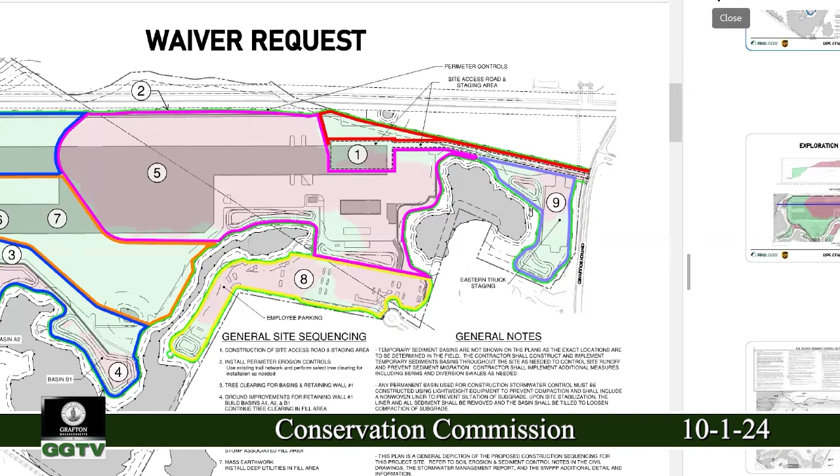Okay, that's very helpful, I appreciate that. I guess the only question I'd have remaining would be: if our third party is going out there, if Leah or Jan or whoever's visiting the site and the erosion control is something out of whack, what's the response? Would that go directly to the superintendent or the foreman? I've seen these things take time in other projects where it has to go up, and someone has to authorize someone to go out and spend money to adjust something because it's out of whack.

So I want to make sure that if the erosion control is not properly put in and we've got a hurricane bearing down, or a significant storm, and we're doing an inspection and something's awry, is there a timeline or a flow that says the superintendent has the ability to fix it within 24 hours, or whatever the typical timeframe is, because of an oncoming storm or concern that a rain event will wash out some other area of the site?

So there's a couple things, just by law and so forth. Bottom line is that unfortunately doing it ahead of something happening is sometimes difficult. But if something does happen, we have some pretty robust things and people to bring in. The whole idea is having someone on site doing it, and we'll have to have a contact person. Obviously they bring it up, and then their response is they're responsible for it. But ultimately, if they're not responding, I get your point.

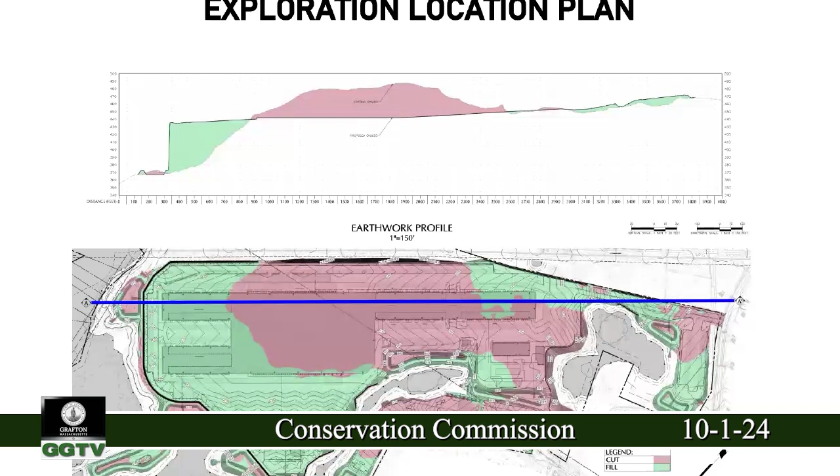Next waiver is work within the no disturb zone, and this is under the bylaw. Leah, anything to add to this? Nope, and again, this has that small area that's being relocated.

Okay, go through the commissioners to see if anyone has a specific comment or question on this. Travis: are we talking about the wetland mitigation that was proposed in the middle of a storm basin? Yeah, so originally they had it underneath the parking. It's an existing depression that falls under our local regulations, it's not jurisdictional at the state level. They originally were going to put it inside a basin and now it's not.

Yeah, it's over. Okay. I couldn't find the updated plans, the old ones I think were still showing up. So, okay, yeah, nothing else from me. Jonathan, I don't have any other questions or comments. Patrick, any questions? No. Okay, I have no additional questions on this.

Do I have a motion? I'll move to... my computer froze. There it goes. Move to grant a waiver for work within the no disturb zone. Second. A motion and a second.

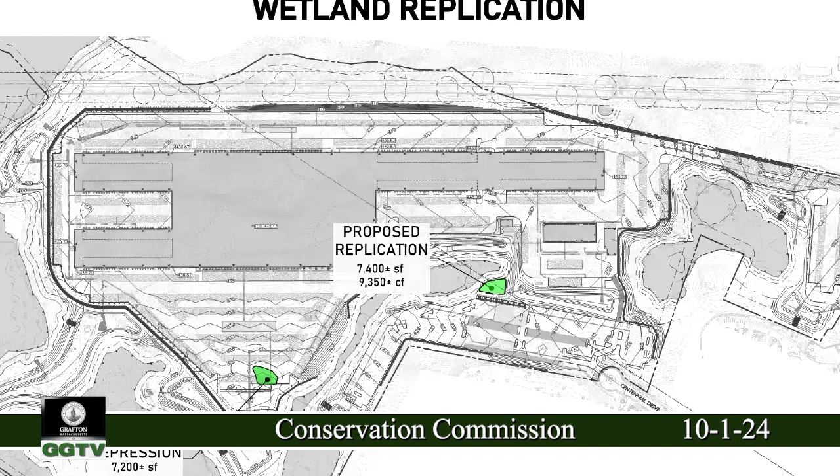All right, Leah, I'm going to turn it back over to you about going through the draft conditions and what the comments were from the applicant, so we can discuss them. Okay, I'm just gonna go through until I either have a question or you guys can stop me. Does that work? That works great.

So for findings at the top, I have that the wetland resource areas west of Summit Brook Pond on certain sheets were not reviewed and confirmed under this order, but everything else was by Ecotech. Number 2 is that isolated wetland and isolated land subject to flooding to be filled and replicated is only jurisdictional under our bylaw, not the act. The third finding just lists the impacts out, so we have those numbers. And the fourth finding is after consultation with our peer reviewer, the commission is in agreement with the applicant's assessment of the extent of riverfront area on site in relation to the beaver impoundment. We talked about that one quite a while ago.

Okay, next section are the waivers that we just went through, and then we go to general conditions from there. I have number 1 highlighted just because, as you can see if you go back to my agent report for a second, we will just need a final stamped plan set, both electronic and hard copy, that incorporates a lot of things we have talked about piecemeal in slide decks and revisions to peer reviewers, and all that needs to come back together into one final set that I can then refer to in number 1.

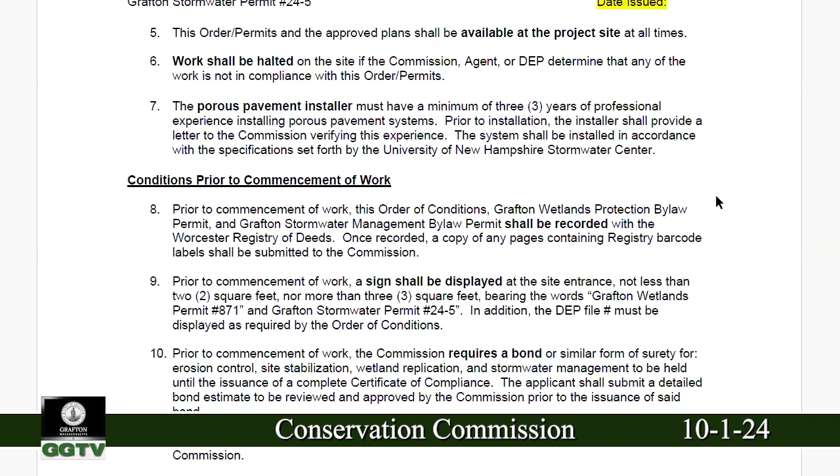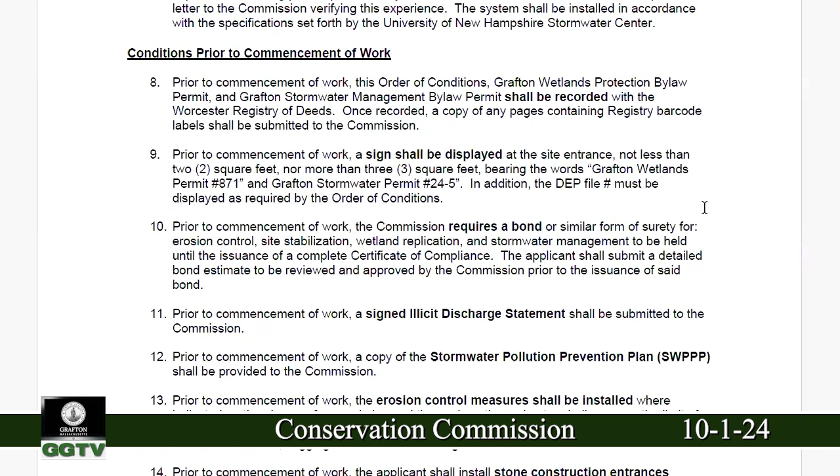Okay, then we get into prior to commencement of work. Number 8, they'll record the documents at the registry. Number 9, they'll put up their permit number sign on site. 10, we're asking for a bond for erosion control, site stabilization, wetland replication, and stormwater management. They go get an estimate of what it would take to cover that work. We send that estimate to our peer reviewer. Once we agree on that amount, then they go solidify the bond, which we hand over to the treasurer collector to hold on to. Number 11, we'll want a signed illicit discharge statement. 12, we'll want a copy of the SWPPP.

Item 13, erosion control will be installed where they show on their plans. Those along the perimeter will serve as the limit of disturbance. There is more to come about erosion control, by the way.

Can I just say one thing on 13, as far as the wording goes? Prior to commencement of work, the erosion control shall be installed where indicated on the above referenced plans. Just to add in there that this is the minimum amount of erosion control, and site conditions may warrant more erosion control. It's very specific, is that just because they show certain things on the perimeter, that does not mean they don't have

to do something internal. Again, it's just the erosion control plan is a static thing that you see once, but it changes every single week out there, so they need to keep up with it. So thank you on that one. Sure.

14 is for the construction entrance. They will have two, one on our side, one on the Shrewsbury side.

15 talks about them designating a staging area outside of resource areas and buffer zones. And then I had all construction trailers, dumpsters, portable sanitary facilities, material storage and overnight parking would be in that area. The perimeter would have erosion control around it. The ground would be protected for spills. Any spills would be cleaned up.

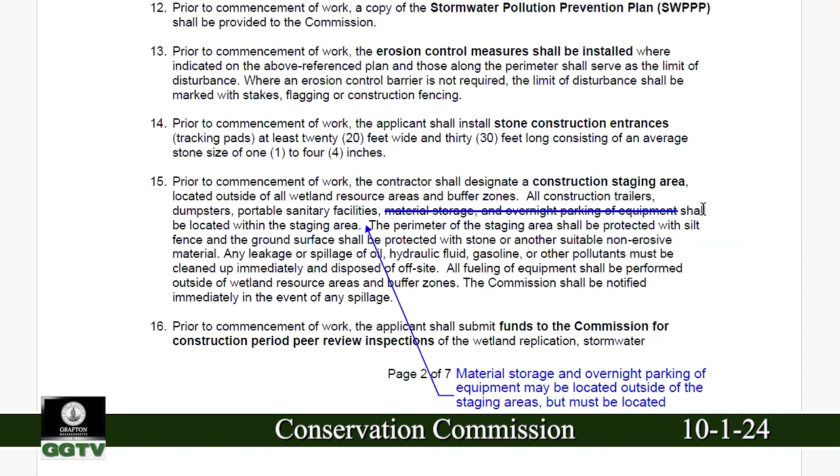Sorry, go ahead, Leah. I'm good. All right, 16, we're asking for funds for those construction period peer review inspections we talked about.

So that'll be to look at wetland replication, stormwater infrastructure installation, and general compliance. And I added that we will coordinate the amount we need to hold, and those inspection dates we can coordinate across Grafton and Shrewsbury because we're using the same peer reviewers, so we don't have to duplicate. Maybe we can get out there all at the same time, be a little bit more efficient.

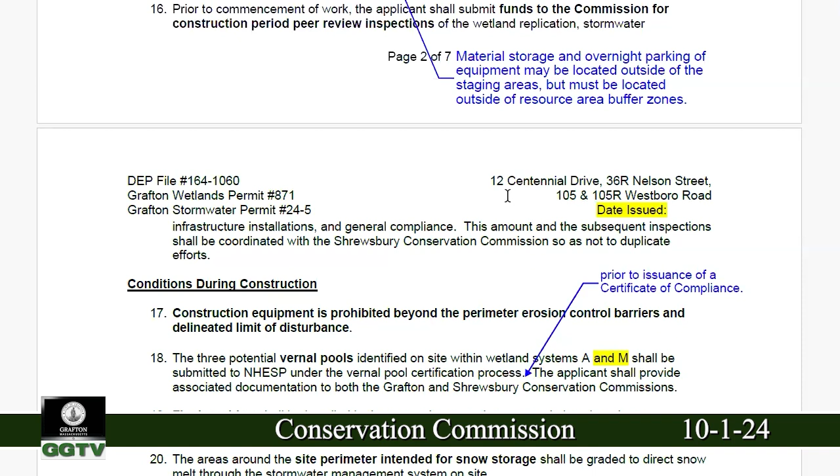So back to the applicant, anything so far within that section other than what we already discussed? Nope, it's all good. Okay, keep on going there, Leah, doing a great job. Thanks.

Then we get into during construction. So construction equipment is prohibited beyond the perimeter erosion control barrier and delineated limit of disturbance. The 3 potential vernal pools identified on site within wetland systems A and M shall be submitted to NHESP under the vernal pool certification process, and the applicant will provide the associated documentation to both us and Shrewsbury Concom.

I highlighted the one in wetland system M. That system is fully in Shrewsbury, so I wasn't sure that we could necessarily call that out here. I know we're trying to coordinate and have some consistency across the two towns, but I didn't know how you guys felt about calling that one out.

And then the applicant proposed a change to the language, just that this all happens before a COC is issued, which I'm okay with that part. My only question on that, what is the construction schedule? Just a broad one, 18 months, 36 months.

Closer to 18 months, okay. The only reason I'm asking is if it gets drawn out, then you're going to have more impacts to a vernal pool from all the activity in the area. So we just want to make sure that it's done in a timely manner so that it hasn't been altered such that certain evidence isn't found. That's all. So the 18 months is not bad.

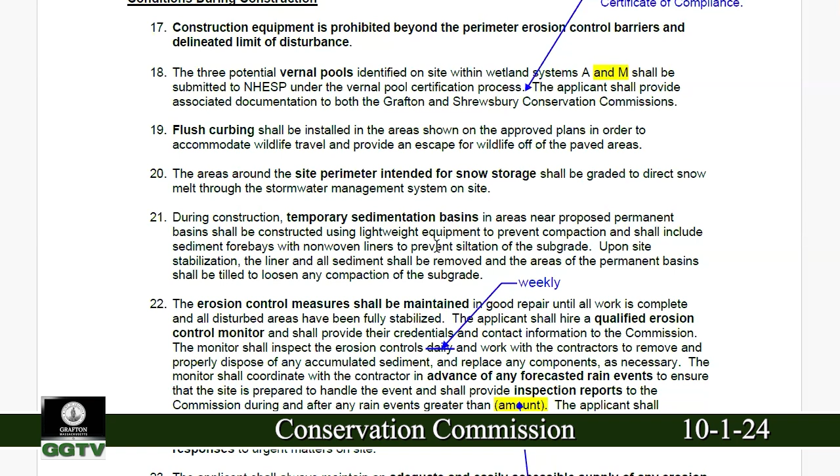21, there are temporary sedimentation basins in areas near proposed permanent basins shall be constructed using lightweight equipment to prevent compaction and shall include sediment forebays with non-woven liners to prevent siltation of the subgrade upon site stabilization. The liner and all sediment will be removed, and the areas of the permanent basins will be tilled to loosen any compaction of the subgrade. Most of that was actually proposed by the applicant.

22 gets more into the erosion control. So the erosion control measures will be maintained in good repair until all work is complete and all disturbed areas have been fully stabilized. The applicant shall hire a qualified erosion control monitor and shall provide their credentials and contact information to the commission. The monitor will inspect the erosion controls daily, and they're proposing weekly, and work with the contractors to remove and properly dispose of any accumulated sediment and replace any components as necessary. The monitor shall coordinate with the contractor in advance of any forecasted rain events to ensure that the site is prepared to handle the event and shall provide inspection reports to the commission during and after any rain events greater than, they proposed, half an inch.

The applicant shall immediately control any erosion problems that occur. The applicant shall also provide the commission with the contact info for the contractor who is to be responsible for 24-hour responses to urgent matters on site. I'll pause there because I know that got very detailed.

So a couple of things when you say the applicant shall hire a qualified erosion control monitor - the EPA has a new credential for erosion control professionals. They've tried to standardize it. I'll go to the applicant - you must be familiar with that process now, with the certification through the EPA. Yes. Okay, so I would, and we can give you that information. So that would be one of the certifications or equal.

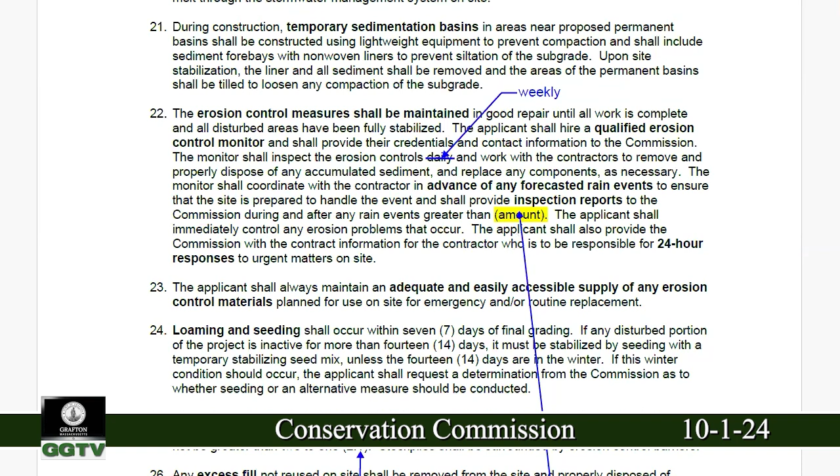Item 25: materials shall not be stockpiled within the 100-foot buffer zone. Soil stockpiles must be stabilized or covered at the end of each workday. Stockpile side slopes shall not be greater than 2:1, and stockpiles shall be surrounded by erosion control barriers. They are proposing striking through the middle of that, so that stockpiles not actively used for 14 days or longer shall be stabilized or covered.

So I can tell you that suggestion comes right out of the general construction permit that's done through NPDES. If it's an active pile, it's active. If it sits there for more than 14 days, it has to be stabilized or covered. That's standard, and that's already going to be required on site.

So the question is, at the end of each workday, that's kind of a lot. I think maybe one alternative, probably should be, stockpiles must be stabilized or covered prior to any rainfall event. But requiring it after each day is a little uncommon, I'll say it that way. The intent is we don't want something to happen overnight and have half your site compromised, with this amount of soil being moved, those stockpiles are going to be huge.

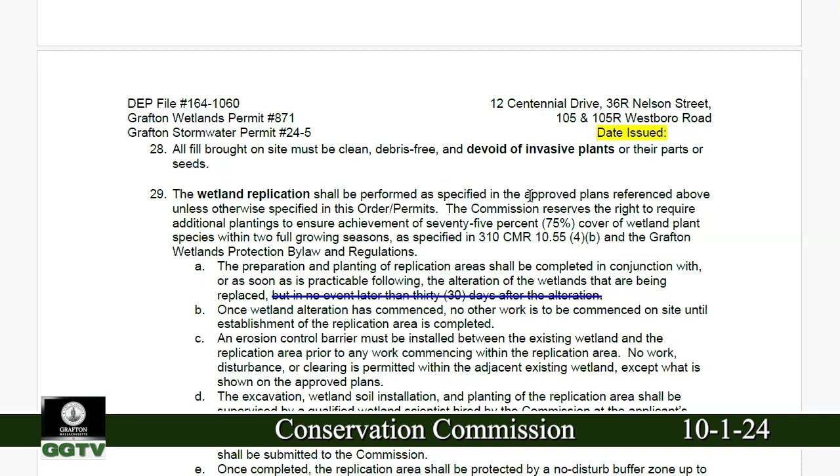29 gets into the wetland replication. It will be performed as specified in the approved plan. We reserve the right to require additional plantings to achieve 75% cover within 2 growing seasons.

Preparation and planting of the replication area shall be completed in conjunction with or as soon as practicable following the alteration of the wetlands that are being replaced, but in no event later than 30 days after the alteration. They're proposing striking through that, and I'll pause here.

I'd rather leave that sentence there, but give them - just say if the applicant is unable to accomplish this within the 30 days, they shall let the commission know, and they need to come up with a schedule. So it's more than just no, you can't do it. If you can't do it, you've got to tell us how you are going to do it and the timing of it.

If I may, the reason we wanted to strike that specific sentence was the filling of the isolated area is going to occur pretty early in the earthwork process. And obviously we'll have an active construction site for quite a while, and I don't think it's feasible to get all of the fine grading and plantings completed in the replication area that early in the process.

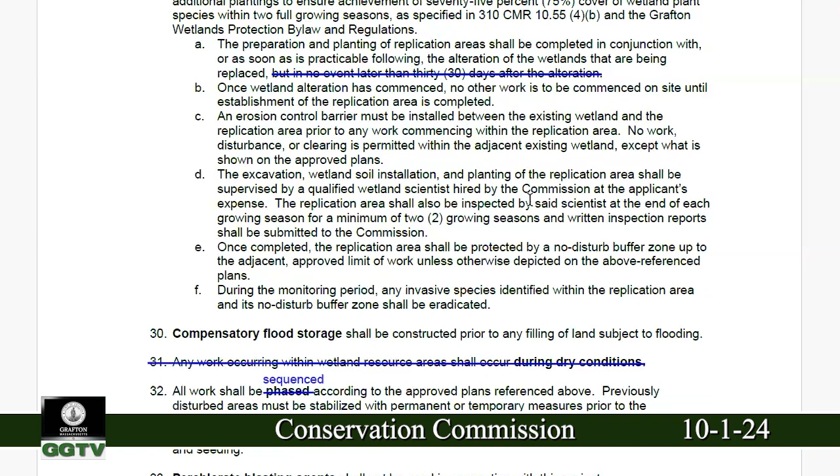There's a provision, I think down lower, maybe it's number 34, about replicating the volume of the ILSF, which is fine, we can do that. But we were anticipating leaving the fine grading and planting and establishment period to a little bit later in the project. So why don't we do a different approach?

Sometimes these things get left to the very end, and they don't always turn out great. So why don't we, instead of saying 'but in no event later than 30 days,' say the applicant shall submit a plan and schedule of when each of the areas will be excavated and planted and so forth, so that we have a schedule to go by and we should know when it's done.

And I'm not looking for any kind of big long report, I'm looking for just the basics of when you can get to it, and submit that for approval. That would be more of a staff approval as opposed to coming back in front of the commission, and it would be more just if it's reasonable and so forth. I would suggest putting in the reasons why from a schedule standpoint - that's what we're looking for, the best outcome. So that's what's driving us.

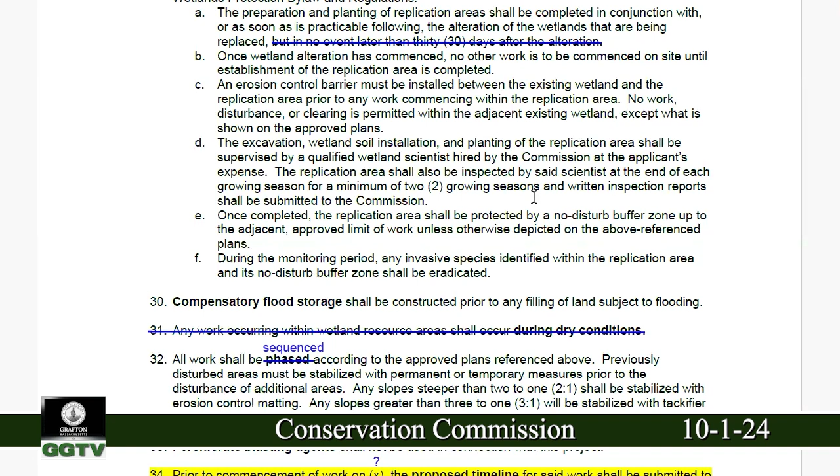Leah, does that sound okay? Yeah, I think that works for us. So I'll kind of stop and go around to the commissioners and see if anyone has anything, but always feel free to chime in if you want.

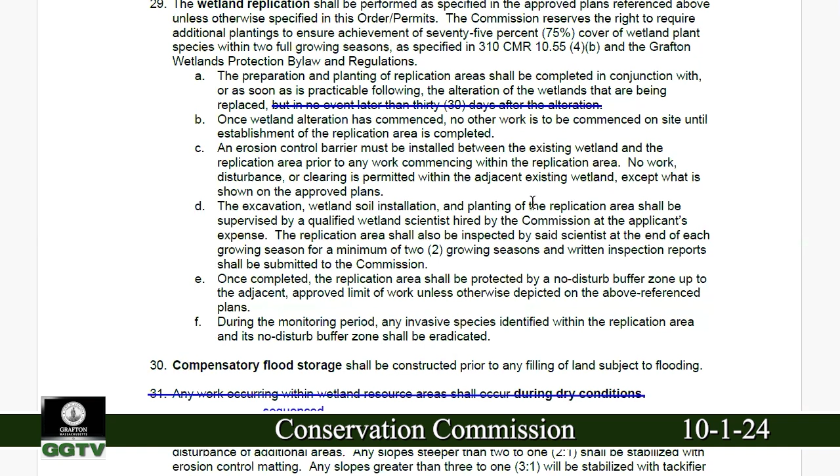Anything else on these, Jonathan? No, I don't have anything else. Travis? No, nothing else. Patrick? No. Okay, keep on going, Leah.

All right, 29B: once wetland alteration has commenced, no other work is to be commenced on site until establishment of the replication area is completed. I think based on what we were just talking about, we need to strike B entirely. And again, what we're talking about is that one isolated area, correct? Yes. Okay.

C: erosion control will be installed between the existing wetland and the replication area before work commencing on the replication area. No work, disturbance, or clearing is permitted within the adjacent existing wetland.

D: everything will be supervised by a qualified wetland scientist hired by the commission at the applicant's expense. Replication area will be inspected by that scientist at the end of each growing season for a minimum of 2 seasons, and we will get written reports.

Once completed, the replication area will have a no-disturb buffer zone around it. I worded this as up to the adjacent approved limit of work, because it isn't always 25 feet. Understood. And during the monitoring period, any invasive species in the replication area and its no-disturb zone will be eradicated.

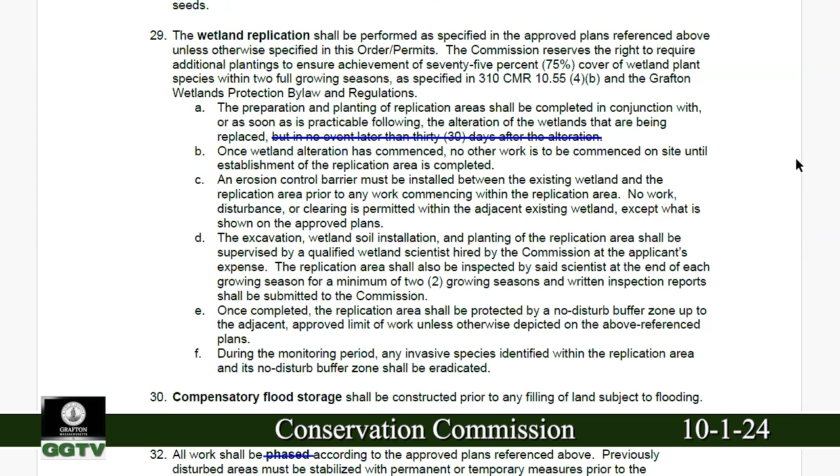30: compensatory flood storage shall be constructed prior to any filling of land subject to flooding. 31: I had any work occurring within wetland resource areas shall occur during dry conditions. They are proposing striking through that condition.

I'll go to the applicant - why? Seems reasonable. The only work we have within the wetland resource area is the filling of that small ILSF area, and that's more likely going to be in the springtime or late winter. In my experience, dry conditions would refer to summertime. Yeah, maybe we need to clarify that portion of it.

So it's kind of an alternate way of doing it, and I understand it's that one location. This is New England, we're experiencing climate change. You could have dry conditions all through the spring, and then not have any of it during the summer. It's more based on that. So Leah, as far as this goes, is it...

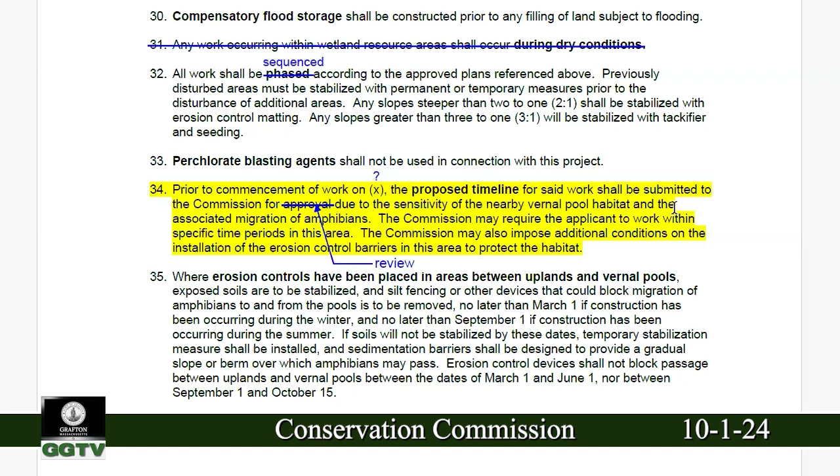36 is lining the catch basins with silt sacks or equivalent product, maintaining them and regularly cleaning them out, and taking them out at final stabilization. 37 is keeping the streets clean by sweeping any sediment tracked onto the adjacent street at the end of each workday. Any construction vehicles exiting the property shall be cleaned of soil prior to traveling on the roads in Grafton.

All equipment washing shall occur within the designated staging area. Any runoff from washing trucks or equipment shall not be directed toward nor dumped into any on-site drainage system or area subject to protection under the act or the bylaw. They'll need an impervious concrete washout structure outside of all resource areas and buffer zones, including signage labeling the structure as the concrete washout area. This is the only location on site where concrete trucks and tools are permitted to be rinsed. All materials deposited within the washout must be legally disposed of off-site.

They're proposing a couple changes: one, the addition of 'in accordance with the approved plans,' and two, a strike through on the last sentence. They have 'no concrete for reuse shall be placed in the wetland buffers.'

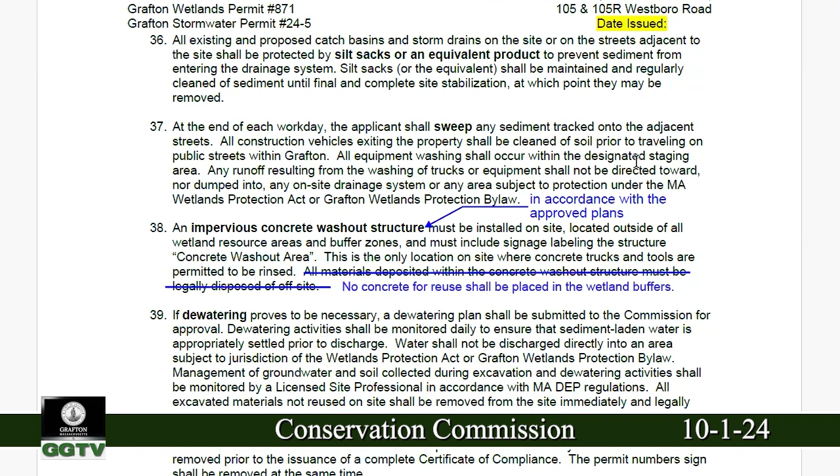Item 39: if dewatering proves to be necessary, we'll want to see the dewatering plan. Dewatering will be monitored daily to ensure sediment-laden water is appropriately settled prior to discharge. Water shall not be discharged directly into an area subject to jurisdiction of the act or the bylaw. Management of groundwater and soil collected during excavation and dewatering shall be monitored by an LSP in accordance with DEP regs, and all excavated materials not reused on site shall be removed from the site and legally disposed of.

Item 40: all erosion control will stay in place until the site is fully stabilized, but shall be removed prior to the issuance of a complete COC, at which time the permit number sign can come down as well.

And they're proposing adding, after 'until the site is fully stabilized,' the phrase 'or as directed or authorized by the commission or their agent.' I'm fine with that. Yeah, if a portion of it can get taken down, I don't have a problem with that.

Upon completion of construction, they'll contact me for a test of the porous pavement to make sure it functions as designed. The test consists of pouring water on the system at a rate of 5 gallons per minute, measuring the distance the water spreads across the surface, and the rate of infiltration. Water should not spread further than 5 feet across the surface. The test will be performed at multiple locations, and the system will be inspected for smearing and other indicators of improper installation.

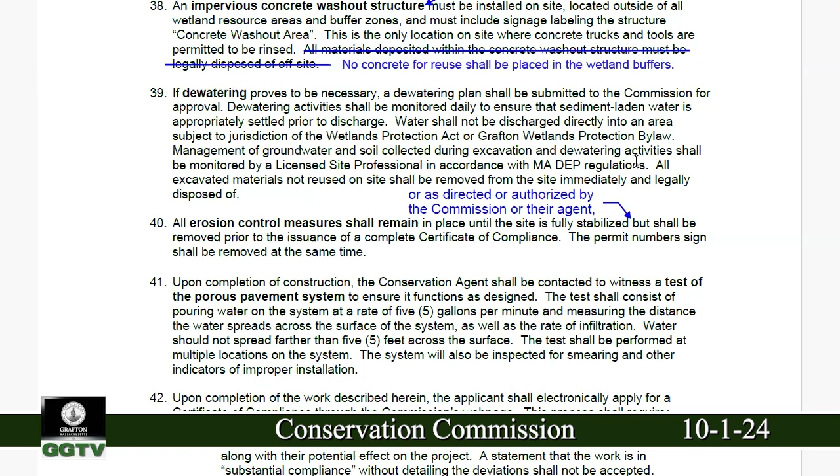Item 42 is just how to request a certificate of compliance. Before I get into ongoing conditions, any other questions so far?

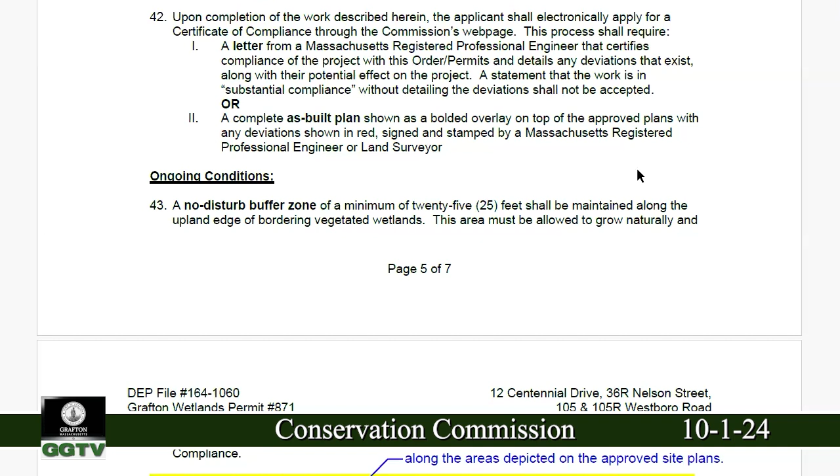I have one quick question for the applicant, it's been a while since I looked at the plans. It's an extremely large building, but you don't have any SOEs or anything you need to do ahead of construction, do you? No, not for the building. Okay, for the large retaining wall there could be some ground improvements. I'm just thinking about all these things and how that can change the flow of groundwater depending on how construction happens. An SOE is support of excavation, there's all different types, basically a big wall in the ground. Sometimes you can have them 40, 50 feet deep, and there's ramifications as far as groundwater. I'm just asking a general question. So it's a flat building, slab on grade, right? That's right. Okay, that's just a little sidestep.

So go ahead, Leah. Okay, ongoing conditions - item 43 sets up our 25-foot no-disturb buffer. Item 44 gets into signage for the no-disturb area. Our standard is that signs will be placed no more than 20 feet apart, at a minimum of 4 inches in diameter, rugged weather-resistant material, mounted on a steel post at a height of 1 to 5 feet above ground, with a minimum of 24 inches of the post buried below ground, with the words 'protected no disturb wetland buffer' on the signs.

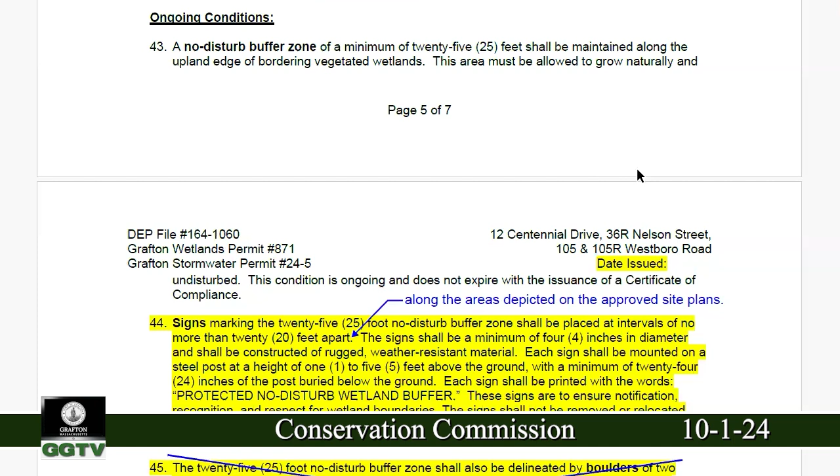They are proposing, in addition to the standard 20-foot spacing, to add signage along the areas depicted on the approved site plans. They provide a markup of the plan - if Jan, you can switch over to that, we can look at where they are proposing to put the signage.

Jan loves it when I don't tell her ahead of time what to have ready. She's cursing you right now. I can usually guess, but sometimes I'm thrown off. Let's see, should be coming up.

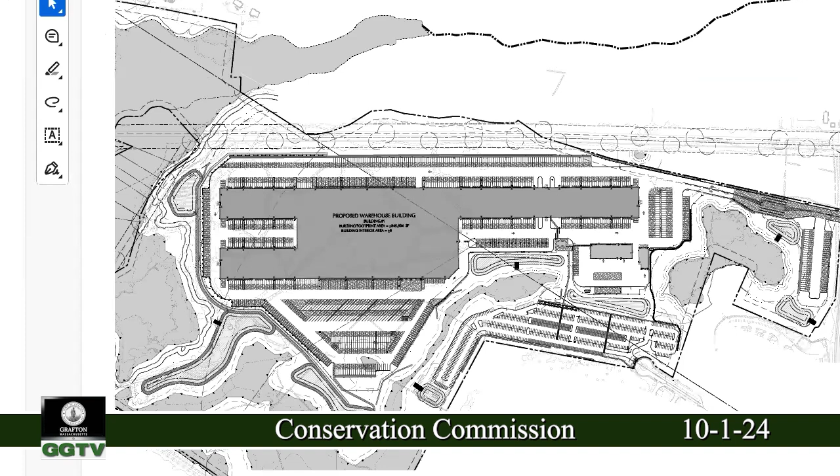It'll probably just take a second to load, but they did mark out proposed locations for the no-disturb signs. So the two orange lines would put signage around those wetlands. The northeastern one is entirely in Shrewsbury. The more central one is a little bit over the town line, but mostly in Grafton.

I will add that you can see that wetland system continues all the way around the next couple of basins, and off the very back of the site - actually 3 basins back there. So I don't know that we need to have the signs out at the wood line behind the basins, but I would maybe want to add some where the wetland continues to wrap around what's gonna be truck parking and stuff like that, because we're trying to protect from landscaping crews dumping stuff over the edge.

It would be helpful where the retaining wall is on the back side, because that's a huge drop. To Leah's point, where the orange is coming around on the central one, are you talking about extending it further down? I'm just looking to see as far as the grading and where the vegetation and retaining walls are going to be - just so that some of it may be sticking it on the retaining wall or something.

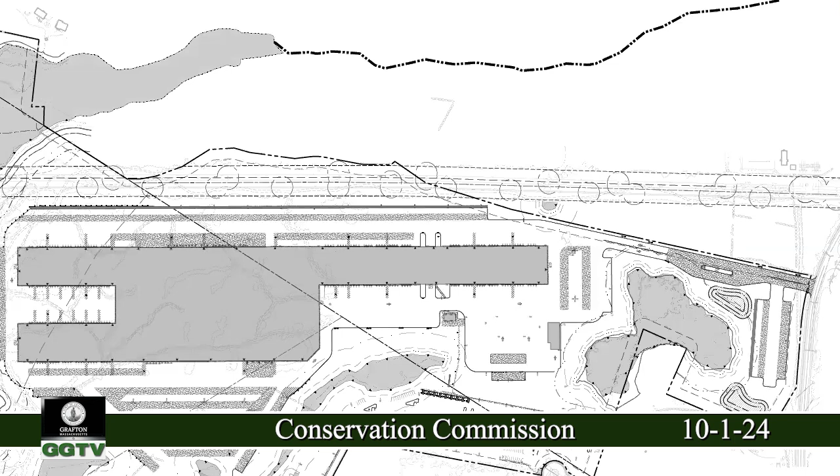I guess another question too - is there already chain link fencing or something proposed at the top of that wall anyway? And so then maybe we count that as already protected, so do we also need to mark it out with signage? I guess there might be a fair trade-off there.

I can weigh in, give a little context if that's okay. Around the truck parking area, the entire warehouse truck parking area will have a secured perimeter fence - there'll be a 6-foot chain link fence around the entire area. So where we've proposed this orange line is essentially where we thought it may be likely for people or landscape crews to be, and certainly understand the intent of the signage and barrier so that there's no dumping, no over-mowing, things like that.

Didn't really see the need - it's very, very rare that anyone's down near the basins. Regular maintenance just of the basins themselves are really all that should be occurring down there.

I think having a plan like this is certainly acceptable. It's just kind of getting where that needs to be. That could be taking a plan like this and adding around the back, indicating where there's chain link fence, so that automatically kind of goes away. And I'm just not sure where all the retaining walls are. So just taking something like this and indicating you understand what we're trying to prevent. There might be a few other little places. What we can do is, I mean, you already...

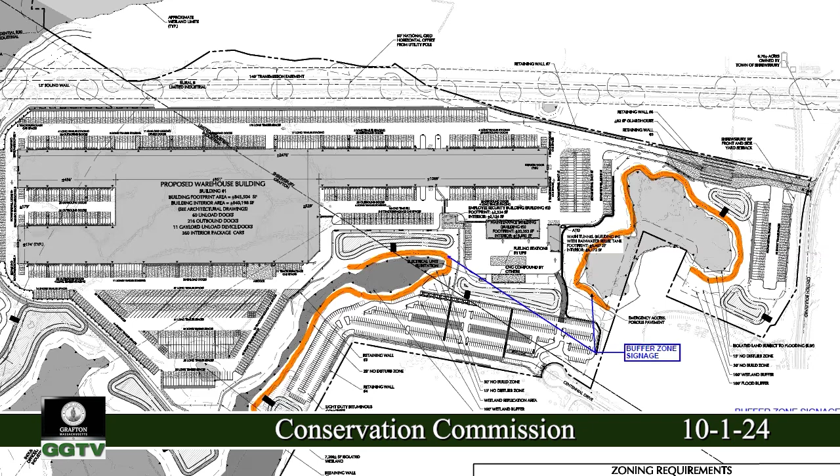All right, Leah, rocking and rolling here. Okay. 46, no dumping in the no-disturb zone. 47, herbicide and pesticide won't be used in the buffer zone. Fertilizer can be used if they give us a soil analysis that shows it needs to be. 48, sodium-based de-icing products shall not be used on the driveways or parking areas within the buffer zone. They're proposing, except for where runoff is directed toward the site's stormwater system.

Yeah, and the reason for that addition is, I don't know that you can tell a snow maintenance crew that this part of the parking lot is in the 100-foot buffer, this part isn't, so therefore you can't use salt here. Everything's directed inward to the drainage conveyance, will run through the stormwater system, and get water quality treatment. That's essentially the intent of why I added that note.

So it'd be great if the stormwater treatment system actually treated salt, which it doesn't. It's soluble, and at best it's going to go in the ground. See, this is the reason why you should have put all porous pavement in - then you wouldn't have to use salt. Big benefit there.

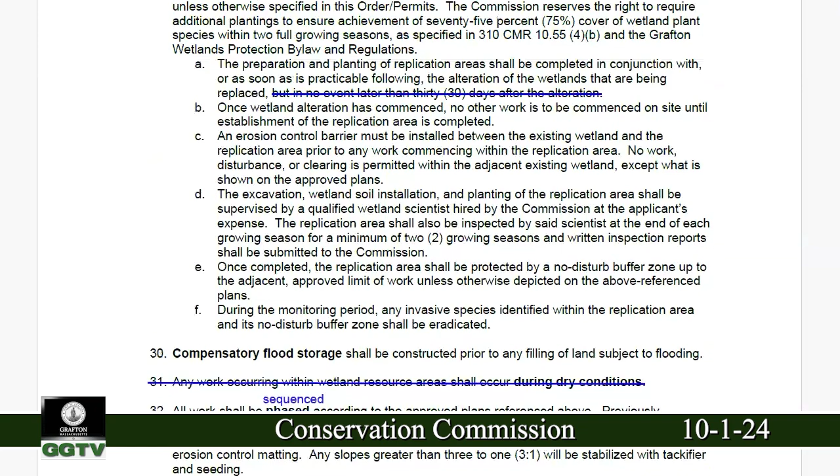The only other thing on this order of conditions, at the top, is maybe put a note on the conditions - not a finding, just a notification - that this site in Grafton abuts the continuation of the site in Shrewsbury, and refer that there is an order of conditions issued from Shrewsbury. Just more of an FYI if someone picks this up in 10 years. Sure, it doesn't really change anything, it's just something to notify people.

Yeah, from the two different towns. That's all. All right.

Now also, if anyone in the public would like to ask any questions, we've gone through a lot of detail. Happy to clarify some of the things we're trying to do here. What we're trying to do with the conditions is protect the wetlands during construction, but also provide ongoing maintenance and protection of the wetlands. So if anyone has any questions, please raise your hand and we'll call on you.

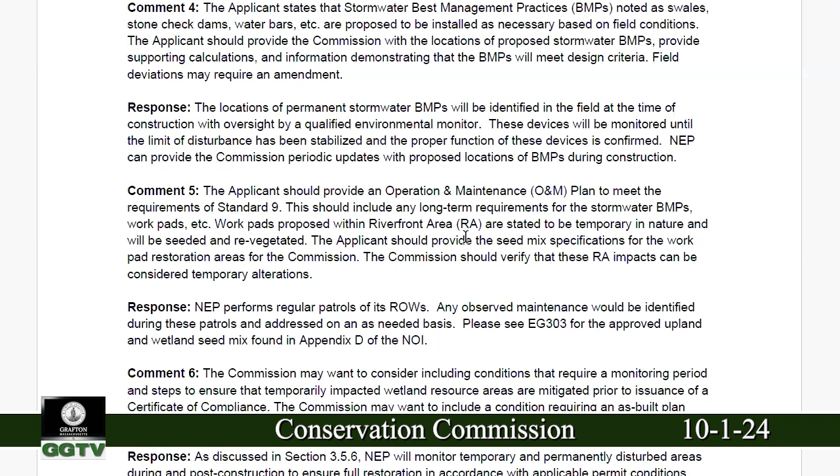Okay, based on that, go back to the applicant. Do you have anything else to add or any questions on the conditions or findings? None from me.

Okay, next up is to vote. Do I have a motion to close the hearing, accept, and issue the order of conditions with the findings and proposed conditions as discussed? So moved. Second. We have a motion and a second. Roll call vote. Travis, yes. Jonathan, yes. Patrick, yes. And I'm also a yes. Motion passes.